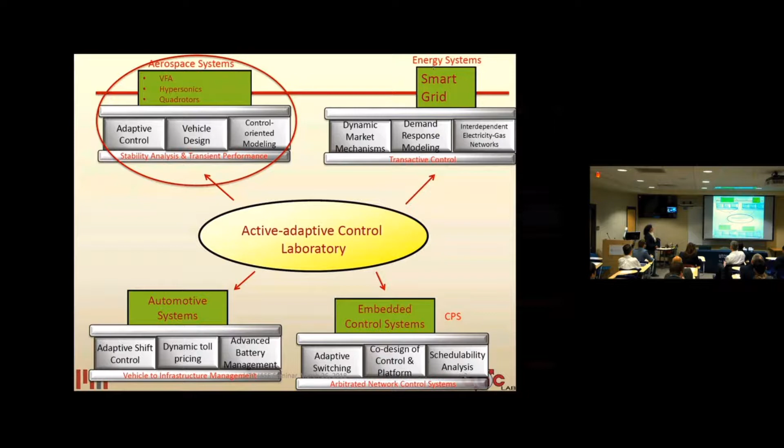So what I'd like to focus on today is this. And so if you want to hear about other topics, there might be other venues, and certainly I'm going to talk about this in Copenhagen. So moving forward.

I'm going to roughly go about talking about adaptive control using these three broad steps. So a bit of history. So we'll start with what exactly was the genesis, if you will, of designing adaptive systems in the context of engineering, the stability framework that was introduced, and how we really think about adaptation in the context of the problems that we've looked at and applied to a few problems in practice.

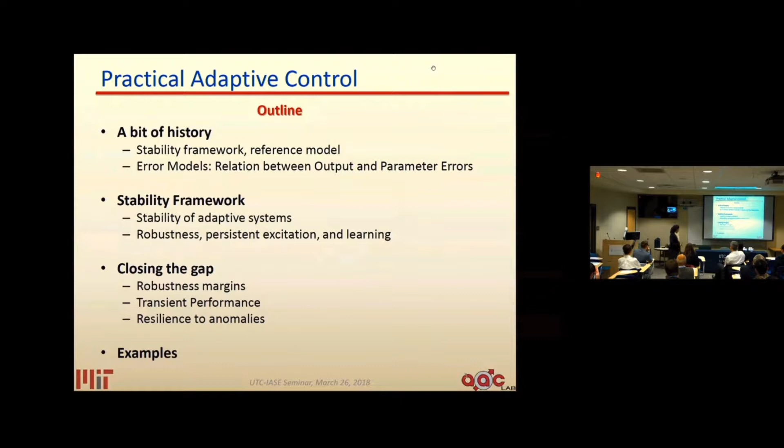And what really distinguishes what was done before and what was brought into the picture that sort of laid the foundations for adaptive control. And given that we've got the stability framework, what exactly needs to be done in order to take this methodology and transfer it to technology? And some of the things that would be relevant in this, the results that we've achieved in this context. And like I said before, I'll end with some videos.

So adaptation really is the key word here. And so the idea is that what we adapt is basically parameters in a controller. So we are talking about control, which means there is a notion of regulation. You track around a desired set point, or you track a desired trajectory, whatever is considered as the right thing to do, the desirable thing to do. Because it might be optimal, it might be fast, it might give you the right kind of performance that you're looking for, it might give you accuracy, all of that says that there is a control problem.

So typically in any control solution, what we do is that we employ a model. We need to know what is it that the system is doing, so that the controller is essentially an inverse problem, right? So you then shape the input the way you would like so that the output behaves in a desired manner. So you take the plant and you invert it in a way, and so that whatever you're putting in is what you'll get out. And so since you know what you want to get out, that's what you'll put in once you have the right inverse, right? So which means you need a model of the system.

Which means you need the model structure. However, the notion of adaptation is that there is something that is uncertain. What is uncertain in this particular problem is that we assume the parameters are uncertain. If you're operating around some trim point, around some set point, then you have certain dynamics, right? And suppose those dynamics are not known, because your operating point can vary, your environment moves you to a different point and it's unbeknownst to you. Therefore, the dynamics around that point, say for instance the Jacobians or the input matrix or the output matrix, are things that are unknown.

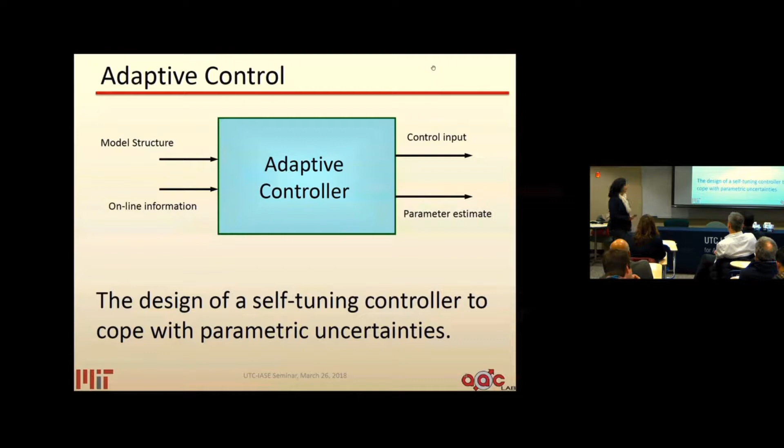If they're unknown, then you need to utilize some way of estimating that unknown quantity. What you do is you do the best you can and put in all of your prior information here, and everything that you gather online, you put it over here. Together you use this to not only generate the control input, which is what any controller would do, but in addition you also generate parameter estimates. Right? So that is what an adaptive controller is. It self-tunes its parameters so that, together with the parameter estimate and whatever you design as a control input, you are adapting to that uncertainty and at the same time providing a compensatory control action which gets you to where you want to go. That is what the adaptive controller is doing, right?

This notion, if you think about it, is conceptually very appealing. It's like, hey, I have this self-governing system, so it's smart and it's figuring things out as it's evolving, and it may make a mistake, but then it figures out from what happened how to correct itself. This really captured the imagination of some key individuals who were in a position to design and install a whole program. It was in the context of flight control, in parallel with the golden era of control systems, where all of the space stuff and optimization were happening too. In fact, what we know as the control conference right now had a precursor known as the Symposium on Adaptive Processes.

Part of that were all these different symposia, talking about the theory of self-adaptive systems and self-adaptive flight controllers. In fact, when designing these aerospace systems, you've got propulsion, you've got aerodynamics, and guidance, navigation, and control. By and large, the C in the G and C denoted adaptive control systems. If you look at even the books that were written at that time, a lot of them were on adaptive systems. Bellman's book talked about deterministic processes, stochastic processes, and adaptive processes. And Widrow's famous book is also about adaptive filters, which was very much a self-tuning entity. The servo mechanisms were all about that.

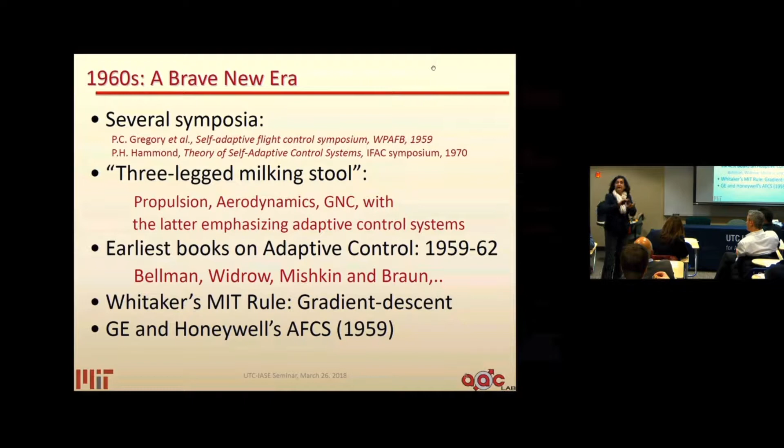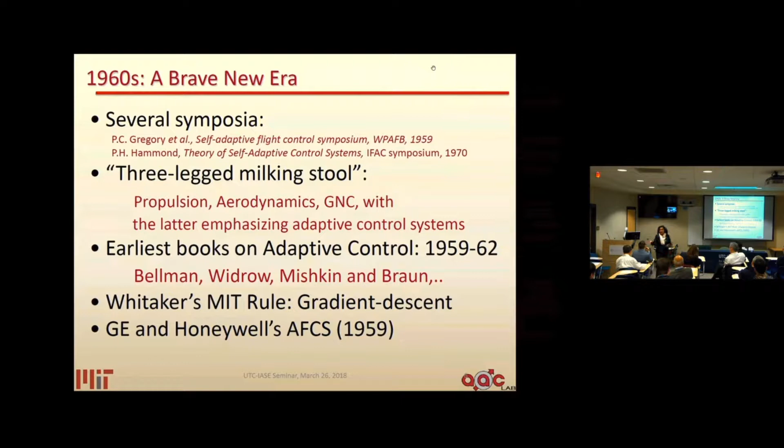It went into a limit cycle, and then there was a huge roll, followed by a side slip, and it crashed. And so the design space over which the adaptation was done and the information that they were gathering were insufficient. That was outside of the flight envelope, exactly. So what happened afterwards, and rightly so, is that people brought in theory. They brought in cautionary inputs, as the title suggests.

So what you're doing when you design these control systems is to not only introduce feedback, but there is some sort of integration involved, and it's nonlinear. So essentially you have a nonlinear integral gain controller, and therefore you're going to have wind-up. Anybody who's worked on PI control knows that wind-up is one of the biggest things that you need to worry about, right? So all of these papers that followed, and Patrick Parks' one, for instance, is a seminal one, basically said you cannot do the gradient rule blindly, and it can lead you to instability.

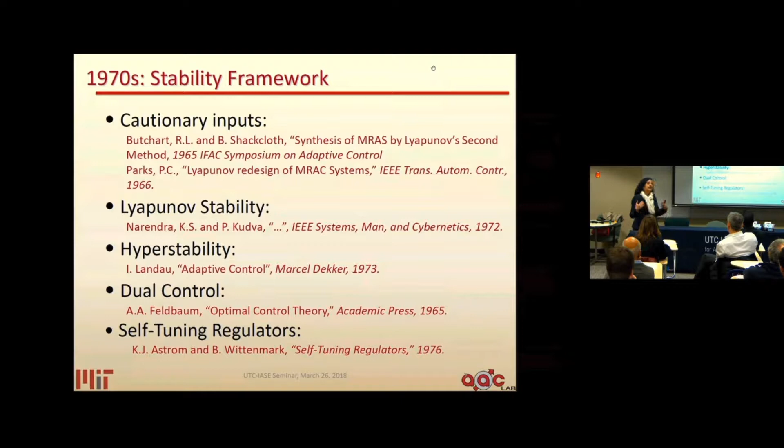And the whole Lyapunov stability framework and a lot of the things that followed, the work of Narendra, Ioan Landau, Karl Åström, Graham Goodwin and Steve Morse, basically provided a framework saying this is how one ought to think about, analyze, and synthesize adaptive control systems. And that led to the foundation. So let me tell you a little bit about what that is. Here are some more technical details.

We all know that when it comes to control, you start with a dynamic system. This is a very familiar set of equations. You've got X as a state, U is a control input, Y is the output, the set of all quantities you can measure, but X captures the most important relevant information, and everything is nonlinear. But the extra twist that you normally do not see in other control problems is that you have a parameter which is unknown. If you have that uncertainty, then you need additional complexity in the controller. So this is the adaptive controller.

And what does it do? It starts with something called a tracking error. I'll tell you more about it in the coming slides. It gives you a target. It's indicative of the size of the uncertainty that the system has. Then omega is a quantity that corresponds to all of the information that I can gather in real time. It could correspond to the input that I put in, the output, or any kind of filtering quantities or any other states that I can measure, right?

So I use all of that, and then what I introduce is a new state. The new state that I introduce is a parameter estimate for the controller. This could be anything. For instance, let's say PID is your favorite control design that works very well. It could simply be those PID gains which are no longer fixed, but are actually states that are varied deliberately. So theta C could be your Kp, Ki, and Kd, for instance. It could be MPC, though adaptive MPC is right now still complicated to do, and I'll explain why if there's time later on.

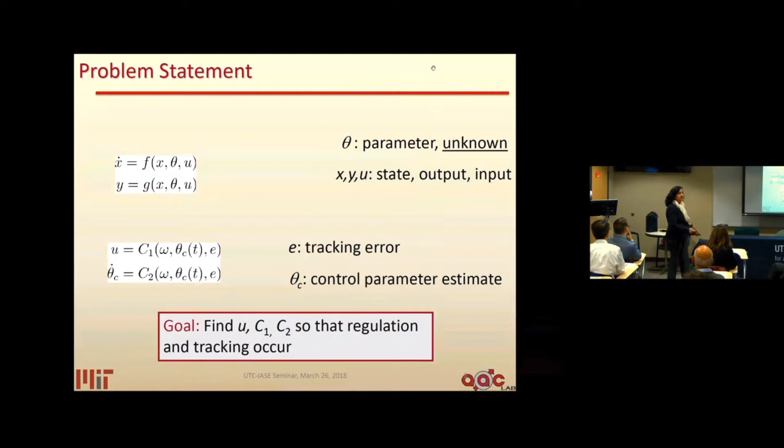I don't know whether 5 will work anymore. So you search in the space of theta by watching what the output error E is, the target error E, and trying to adjust it in a direction that minimizes the error. Right? So all of this means that I need to know what the error E is, which brings in the concept of a reference model. So a reference model is like a teacher.

So let's bring back, and I'm going to return to the analogy again in a later slide. You're a child and you're learning to walk, and your parent, presumably, is guiding you to teach you how to walk, right? So the reference model is like your teacher, like your parent. And because you're still learning, you're in the very initial stages where you don't know exactly when to take that next step and when to gain that stability and when to move into the next gait, etc., right? So there are these things that you need to learn, and so you need a target.

And that target basically is this guy. How do I pick it? Remember that it's not like I know nothing about it. There is some prior information. And that prior information is whatever you know to be the nominal model. And for that nominal model, you will design a nominal controller. And remember, control is an inverse problem. So you would pick this in such a way that the output basically follows a command signal, right?

If you remember your control history, that's basically how control came into its own as a discipline, designing servo mechanisms around the time of World War II. So you want this guy to follow this guy. So you design a controller so that automatically you regulate your design to be always around the command signal, right? So that's what this reference model is. So then what do you do? You hold on to this reference model in order to come up with this target error. How do you do that?

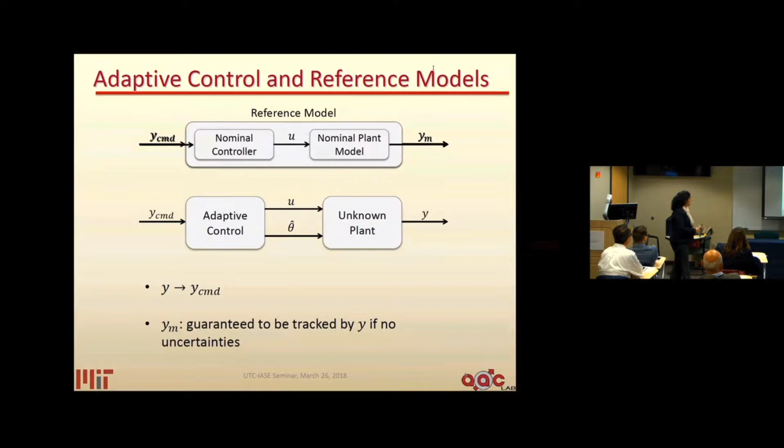So once you pose this problem, the next step is to say, okay, I'm going to have this output error E, and I'm going to choose my parameter in such a way that this error E is reduced. So to do that, let's assume that the correct value that I have for the parameter is theta star. So if theta were equal to theta star, this error E would be 0. So theta star is the uncertain parameter, and I don't know what it should be, therefore I pick some theta, right? That's the actual control value that I pick. So there is an error. So I toss a coin, and that's the parameter that I pick for, let's say, PI gains. So I say it's 5. But I don't know what the correct value is. The correct value might have been 2. So theta tilde is 3.

So what should I do? I need to decrease 5. But that's only because I told you that the correct answer was 2. But in reality, you wouldn't know it, right? So the problem is like this. It is equivalent to your being on a hill, and you want to get to the bottom of the hill. That's the name of the game. The problem is you do not know where the bottom is with respect to where you are, right? What you can measure is an E, but that error E is a very complicated signal, has a very complicated mapping to the parameter error. So this error model basically gives you the relationship between theta tilde and E.

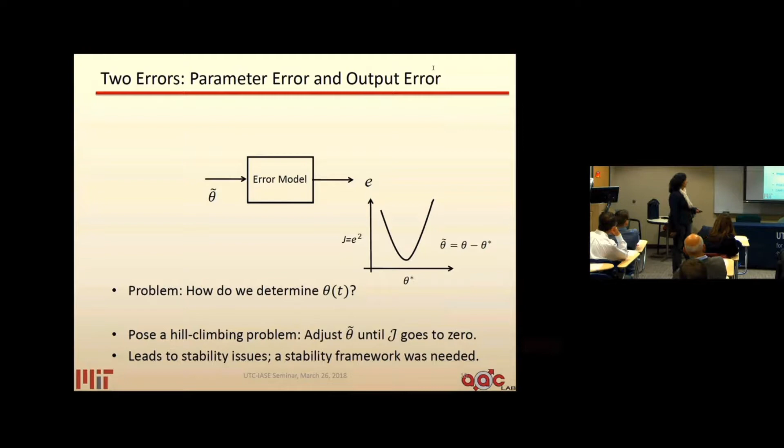So again, I'm going to keep things very simple so that if there are undergraduates in the room, they can also follow. I hope that everybody here has seen a first-order transfer function. So let's assume that this is your reference model. What you're interested in is following a step or any other signal R with some lag. So that's your y sub m. But what you have is some other transfer function, 1 over s minus ap. You do not know what ap is, right?

So I have an error, and it turns out that for this particular problem, I introduce a state feedback, and in this case, there's only one signal, right? So it's just theta times xp, and the answer would be simply, let's say I put it in with a positive sign, you subtract ap and add am. So it's am minus ap that you need in here, so that the closed loop transfer function will look like this. You don't know what ap is, and therefore you don't know what you need to put in.

But the solution is actually very elegant. All you need is to have theta of t to be this nonlinear integral controller, and that will automatically make sure that E will go to 0 for any ap. So this is what is great about it. The parametric uncertainty can be infinite. ap can be anywhere between minus infinity and infinity, and this will solve the problem completely, make sure that everything is stable, and the error E will go to 0.

I'm assuming the am is negative, or? No? am is negative, yes. Okay. Of course. Yes, you want your reference model to be well behaved. Yes, am is negative, correct.

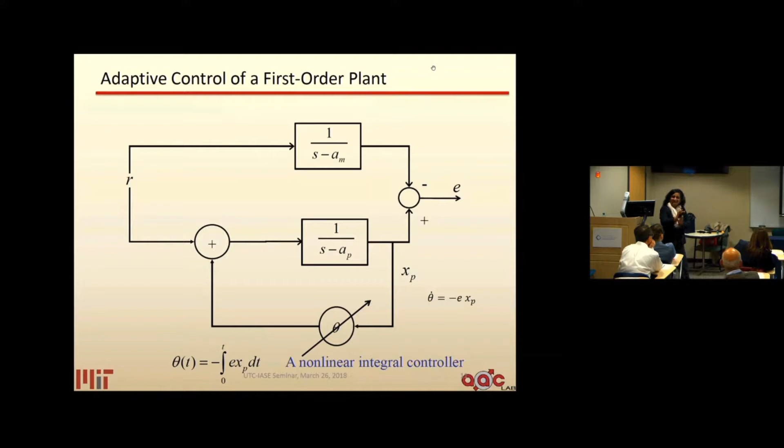All right? Though there is some thinking now as to what happens if your reference models are unstable. The analogy is that if you have an elderly person who is trying to figure out how to get assistance in walking, can another elderly person assist? You could argue that the reference model might have some design that goes into it, whether or not you want to actually make am positive, I don't know, so that it might be easier for an elderly person to be provided assistance than someone who's young and sprightly. So there's some amount of philosophical debate one can have about that.

Okay, so you can take this notion and make it any order and any level of complexity. So this says if I have an nth dimension, then I can still play the same game. I have an error E, and this is basically how my nonlinear integral controller works. This is my reference model. And here is the interesting error modeling.

Remember I talked to you about this nice convex hill? That's no longer present here. It's actually not even an algebraic nonlinearity. It's a dynamic nonlinearity that's sitting between your parameter error and E. Look at what's happening here. If theta tilde is the value at present, this is the dynamics that sits between theta tilde and E. And so it's a transfer function, which means that it's dynamic, right? It takes a certain amount of time between the time you introduce a change in the parameter and the time it shows up in the target.

So you need to really have a dynamic stability framework, and that comes from many other tools, including Lyapunov function. So here's the Lyapunov function that we pick for this problem, where you not only have to worry about the standard quadratic term that you use in order to look at stability, this is for instance what you do in linear systems, but you have to also intentionally introduce these other states, and you have to show that this V is going to be non-increasing, and then you introduce other technicalities to show that E will go to 0.

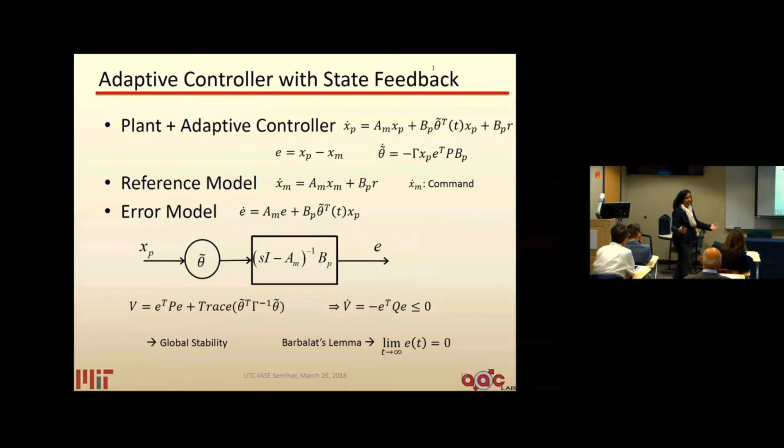So this says that you can take just the notion of what I talked to you about and use a stability framework to adjust parameters in a problem where the parameters are unknown and still guarantee control-centric goals such as tracking, and of course make sure that it's stable. As you take this forward, we can even take it one step further and bring in the problem where all states are not accessible.

So here is where the problem becomes even more challenging, which is that when you have uncertainties, you need to identify and then control, right? So if you think about it, identification and control are really duals of one another. You need infinite time in order to identify, in order for all parameters to converge, because it's exponential. But you can't wait till infinite time because you need to control the system now. You've got your flight control problem where there is a certain amount of roll instability, or if it's a hypersonic vehicle, your phugoid mode is unstable. So you need to come up with a controller now, not after infinite time, right?

So now there is a need to not only do identification but control simultaneously. So these are the problems where adaptive control is really useful, and that's what's happening in here. So here is a very interesting structure where this entity here serves the dual purpose of both an observer and a controller. So it's a very interesting problem where you have to have the right structure so that even when you're identifying,

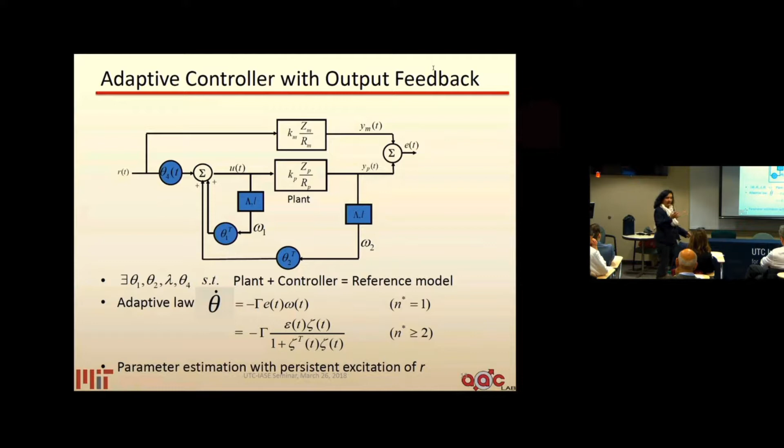I had a discussion with Dugiralo earlier about learning. Now, what is learning? It's a hot topic these days, right, with machine learning. So in this case, learning is learning the correct value of the parameters theta 1 and theta 2. Now, that is a different ballgame from having theta 1 and theta 2 go to a safe value where the closed-loop system is stable. Because there are plenty of multiple values of theta 1, theta 2 that will guarantee stability, but only one unique value, which is the correct value of the controller. And then also indirectly, it also means that you learn the plant parameter. So that happens only if the reference input probes all of the eigenvector directions of the problem, and that is known as persistent excitation. So it's a slightly different thing.

Okay, I'm sorry, I'm giving a lecture, like a seminar class, rather than telling you about new results. So now I get to the new results. So it turns out that when you do all of this adaptation, because you have not learned the correct parameter, there are some robustness issues.

So it turns out that in order to make sure that even when you adapt, and when you have all of these disturbances like parameter variations or unmodeled dynamics or disturbances, you have to have a certain amount of changes in the way in which you design the adaptive law, or you use persistent excitation. And this was what was done in the 90s, and that gave us global solutions when you have external disturbances which are bounded or time-varying parameters.

So the question is, now that you've got all of these results, which give you a stability framework and also a certain amount of robustness, what remains that stops you from applying this in practice? Turns out there are a number of problems. The first one is that if you've got unmodeled dynamics, like, let's say, you always have an actuator that actually implements whatever control input you're putting in, and invariably in the control design, you neglect the actuator dynamics, saying, hey, it acts very quickly. So in principle, the signal here is exactly the same as that signal, and I can think of this as a straight wire. It's not true in general.

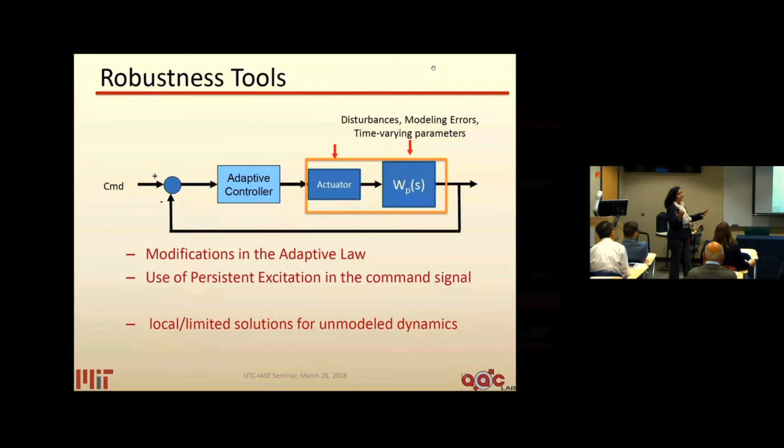You always have unmodeled dynamics, not just due to that, but simply because your control model is often much more simplified compared to the evaluation model. What about nonlinearity? Nonlinearity, again, you can think of as additional perturbations that introduce robustness issues. Turns out that there are no global answers, and this has been an open problem for the past 30 years.

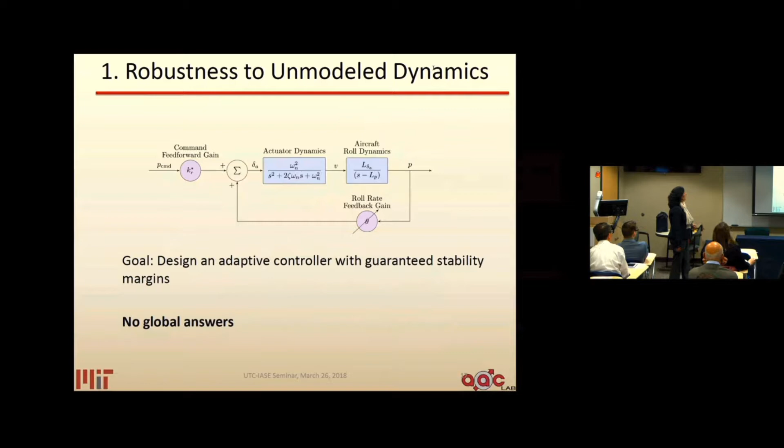The other interesting thing is that if you do the simulations for an adaptive controller, and those of you who have worked with PI controllers can really relate to that, when you crank up the gain in any PI controller, you introduce a lot of oscillations. And that's what happens in an adaptive controller too. This is an additional adaptation gain that you can introduce in the nonlinear integral gain. As you keep increasing this, these oscillations get worse. And if you have this kind of oscillation, practically you don't want to implement this kind of technology, right? You really have to get rid of them.

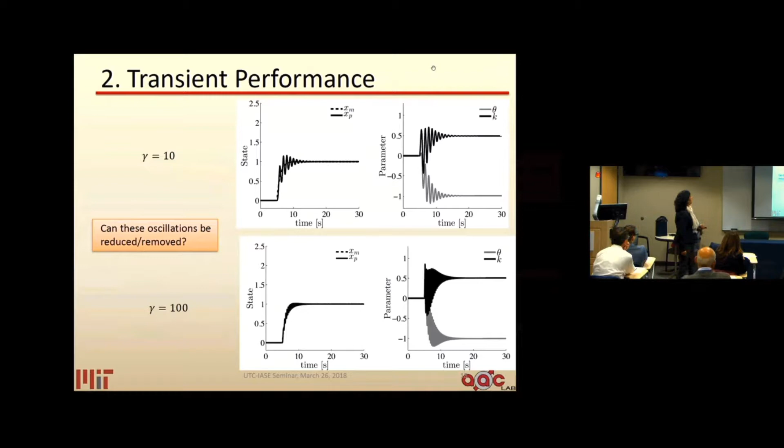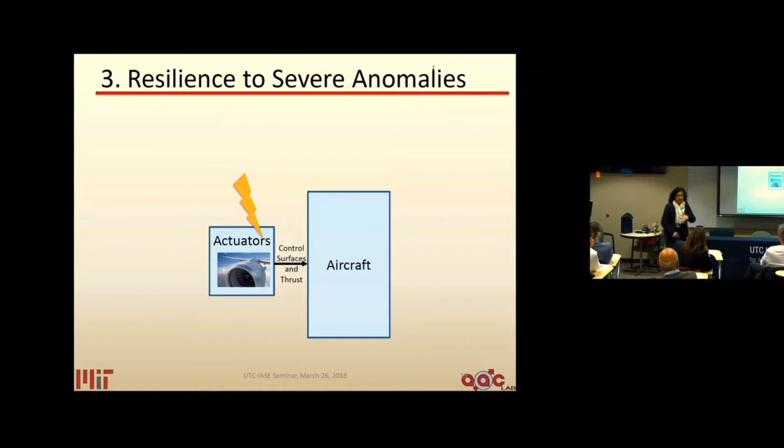The other is: given that you've got this very advanced control design, if you hit it with a very severe anomaly, or you've got all kinds of magnitude saturation and rate saturation, is it possible that your fancy controller can really successfully work and provide the right corrective action, even when, say, a bird flies into the engine, and still deliver satisfactory performance? So these are some questions for which we have answers. And that's what I'd like to share with you in the next 15 minutes or so.

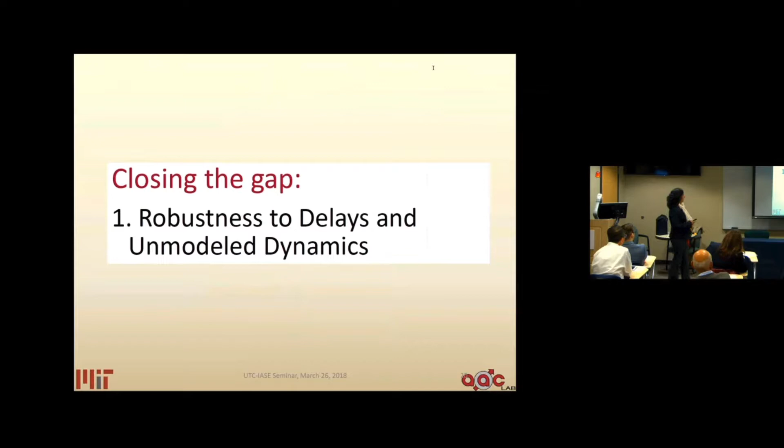So the first one is robustness to unmodeled dynamics. And I'm very proud of this result, which I'm hoping we're about to submit as a paper to the Transactions on Automatic Control, and that the community will receive it with the same enthusiasm that I have. And that is that we have a global answer to the question: when you have unmodeled dynamics, the adaptive controller will be robust. So this is the plant. These are the unmodeled dynamics that we considered.

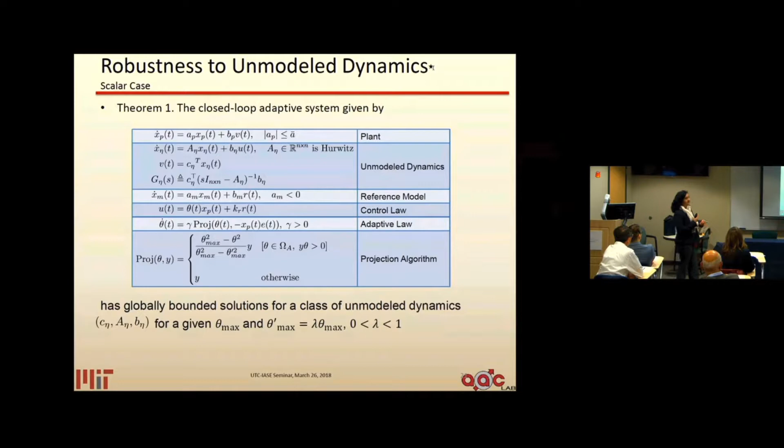If it's first order, then you just pick a first order reference model and you have this very simple control law. And it turns out that for this class of problems, you can show that a simple projection algorithm along with my nonlinear integral controller will guarantee a solution that is globally bounded. And again, this tells you that even though a system is nonlinear and time varying, it is possible to have something equivalent to a gain and phase margin for this nonlinear controller. Essentially, you're representing an nth order system by a first order one. Is that what you're doing? No. It's just a first example.

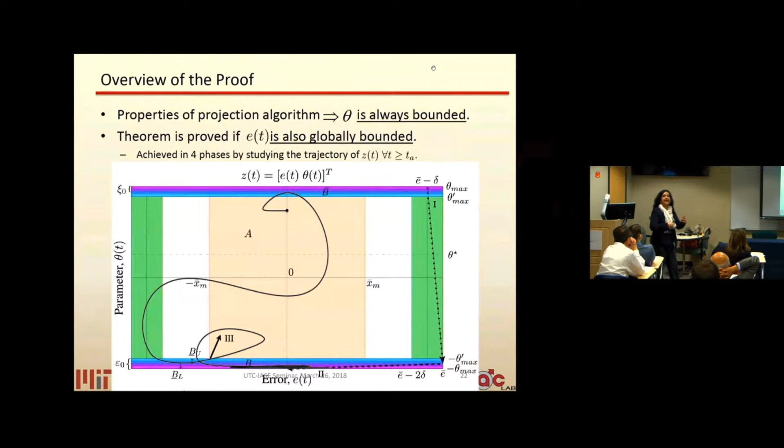Okay. And I want to convey the idea as to why this works. When you use a parameter projection, what that is guaranteeing is that you're putting everything inside this tunnel, inside this box. But the next step you have to show, in order to show that everything is bounded, is that you're not going to run away inside the box. So this is what you pick by design in the controller, but this is what I'm guaranteeing exists through my analysis proof. So that's the idea.

If you go now to a higher order dynamics, and again, it doesn't have to be second order, it can be nth order. So here is the model dynamics, and here's the reference model, and the theorem basically says that even when you have, so you could make that n, not necessarily 2, that you follow these steps in order to show that everything will still be bounded.

And so the idea is, again, basically that you have now 4 dimensions or 2n dimensions, but what you are able to collapse this whole problem into is 2 scalar variables that are most important, which is epsilon 0 and theta 0, and there are these additional dimensions where they're all driven completely by this, and we make use of this fact and the connection, interdependence between these scalar variables and the n-dimensional variables to guarantee boundedness. And so again, this is just to give you a sample of what we've been able to achieve. So the second one is transients.

Yes? How do you know the unmodeled dynamics, or do they have any particular structure? So here, what we are assuming is that you have prior information about what the maximum value of the parameter is that you're going to put in, for which this controller will still be robust with the unmodeled dynamics in there. So let's say that there is a maximum value of theta star. And if you put that theta star in and you have this closed loop, it has a certain amount of robustness margin. And the G eta of S is within that. Okay. So that's the class of perturbation that I can handle.

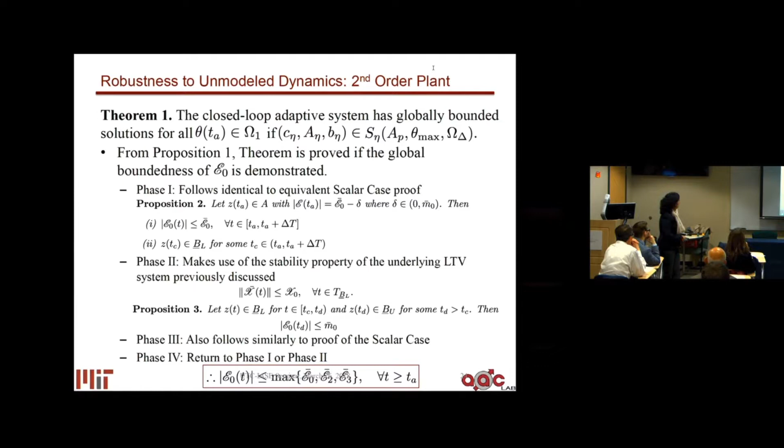we had to come up with the right transformation of variables. Because we had to really separate it into some key variables that capture all of the impact of the unmodeled dynamics. The second thing we had to do is to break it up, and it turns out that there are some interesting relationships between these quantities that I can measure and the remaining quantities that I'm not able to. And it turns out that there is an absolute stability, where you have a strictly positive real transfer function in the forward loop and a first and third quadrant odd monotonic nonlinearity in the feedback loop that you can cast the whole thing into, and that's what gives you global boundedness. So it's a combination of the Lyapunov stability and the right kind of transformations of variables that we had to adopt. Okay?

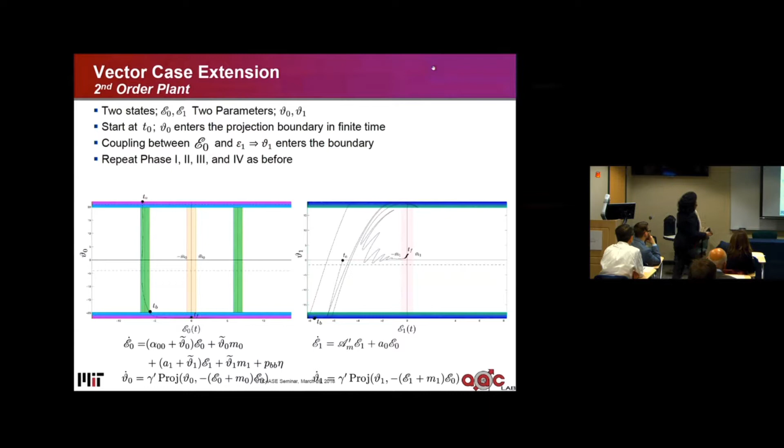All right, so here's the next one, which I think, even the last one, the math was pretty heavy, so those of you who are not familiar with it might have found it more complicated, but this one is very straightforward and very conceptual. It all goes back to the same idea of the child and the parent analogy that I was trying to make. So a reference model is like a teacher, right? So remember I said there's large transients? We came up with a method to fix it. So now we can design adaptive systems which do not show any of those transients. And the idea is the following. We introduce a feedback gain in here. So what is it that this is doing?

So let me see the next slide. Okay. So you're a child and you're trying to learn how to walk, right? So if I have a system where I'm asking it to adapt, that's basically the starting point. So when you have uncertainties and you have no idea what the parameter should be, and you're asked to walk, then it is only understandable that your transients are very poor, right? So remember, my reference model said just walk, right? So that's corresponding to the dashed, straight line here. But here is the adaptive system. It tries to, so what does it have to do? It has to approach this dashed line. But it tries to do that. It's still adapting, right?

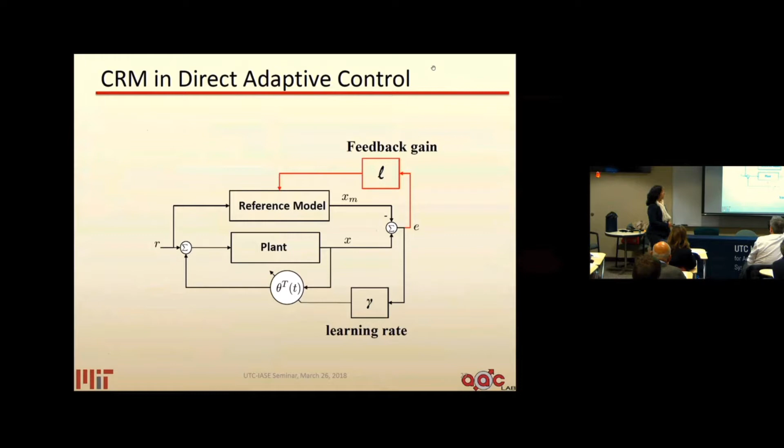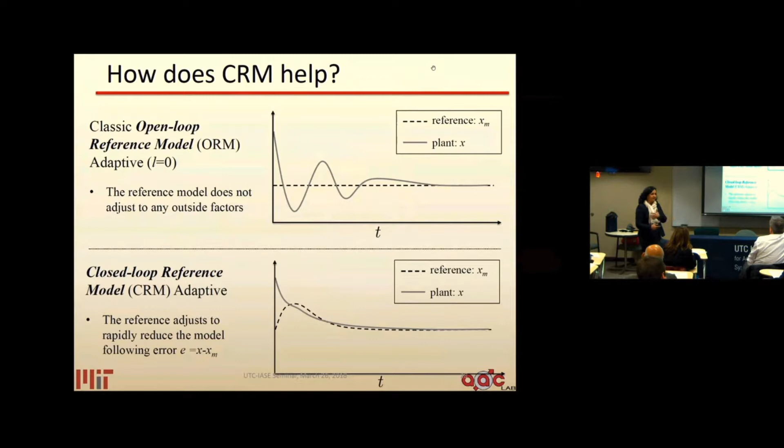So there is an error, and so that error is basically absorbed by the reference model. So instead of saying walk like this, the reference model comes halfway and meets you and says, okay, this is basically how you are supposed to walk. And that closed loop reference model seems to do wonders in terms of fixing the transients. And this is, again, something that we are very happy about.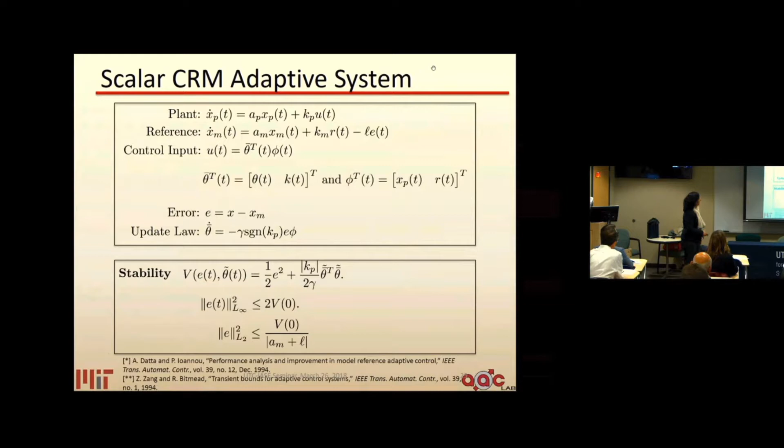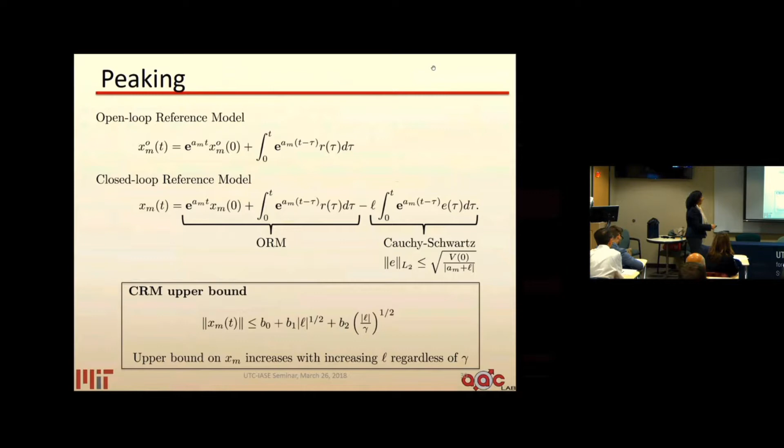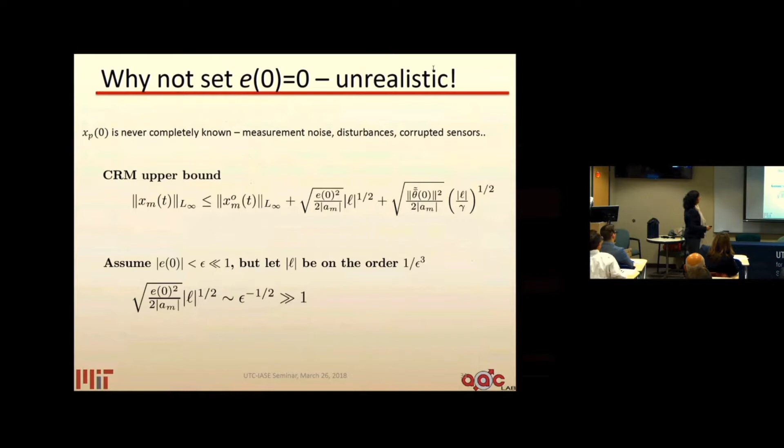And here's all of the math that basically proves that the transients are indeed contained. So here is the plant, and here's the control input, here's the update law. The stability proof basically says, yes, these are the kinds of L2 norms that you're going to have. And then we can analyze what happens to every signal in the loop. We can look at the reference model, and when you have a closed loop reference model component, you can show, remember there was a feedback gain L, and you can derive bounds that basically relate these feedback gains as an upper bound to xm, which is the output of the reference model that I'm using in order to derive the target. And then I can also derive the L infinity bounds.

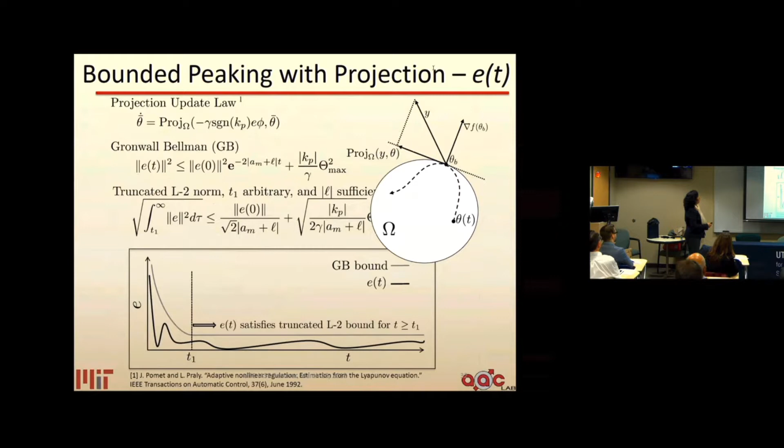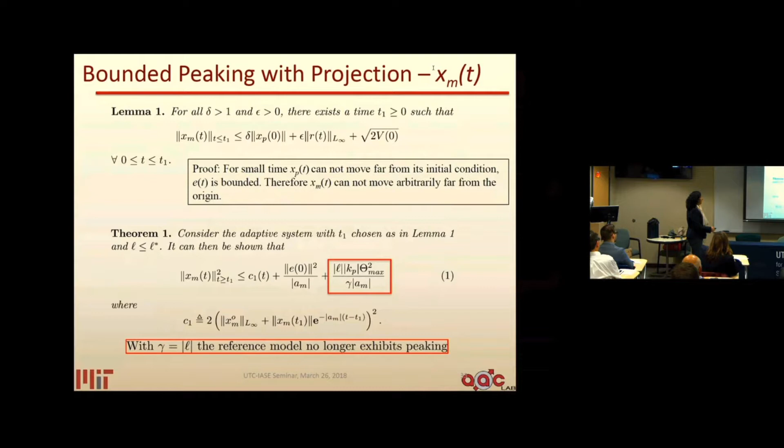The previous one was an L2 bound. Then I take all of that and I use that information to get an L2 bound on what my error is. And once I have the error information, then I am able to get a tighter bound on the reference model outputs, which is what this is saying. And if you pick the adaptation gain to be of the same order as that feedback gain that I used in my closed loop reference model, you can show that the reference model no longer exhibits this peaking phenomenon. And I use that in order to derive the bounds on what my adaptation gain is doing.

So when I have very poor transients, basically the L2 energy contained in it becomes very high. And you want to reduce that. And having the bounds that I showed you enables this. I can prove, remember all of this has the L, and I pick the right scaling between the adaptation gain and the feedback gain. And that gives me an opportunity to go from something like this, where I have a lot of transients, to something that is very smooth, and which basically comes from all of the bounds that I was able to derive, which comes because of the L.

By wrongly selecting L? Okay, so introducing an L gives you an additional degree of freedom. So that basically gives you a way of optimizing the transients. Okay. So certainly, yes, there are values for which you can make it worse, but it also gives you what we can give, which is design guidelines, like for instance, this kind of a thing, which helps me have the right balance between improving the transients and having a control goal.

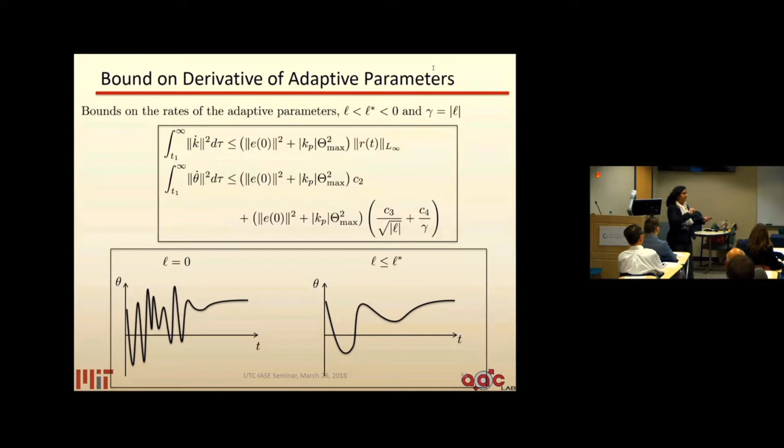Like a helicopter mode. It could actually be. Absolutely. In fact, that's a very good point. So here is a case, let me see. Here is a case where it's like a helicopter parent, where you're essentially, think about it, okay? Learning and synchronization are basically trade-offs. If you're always interested in having very good performance, then it's possible to do that without any learning, right? Which is basically what a helicopter parent does, you know the expression, right? Those of you who, so it's basically like you're always hovering over your child. And you never let the child make any mistakes because you don't want your child to be hurt. Then the child doesn't learn, right? And that's what's happening in here.

So here is a case where L is very small. Here's a case where L is very high. And what was shown in here is the right trade-off between synchronization, which is here, and learning. See, because here, this is what you want the reference model to be. Whereas the closed loop meets you all the way, right? And so you don't want that. So that's basically the idea in here. So you can see that everything on this side had no L.

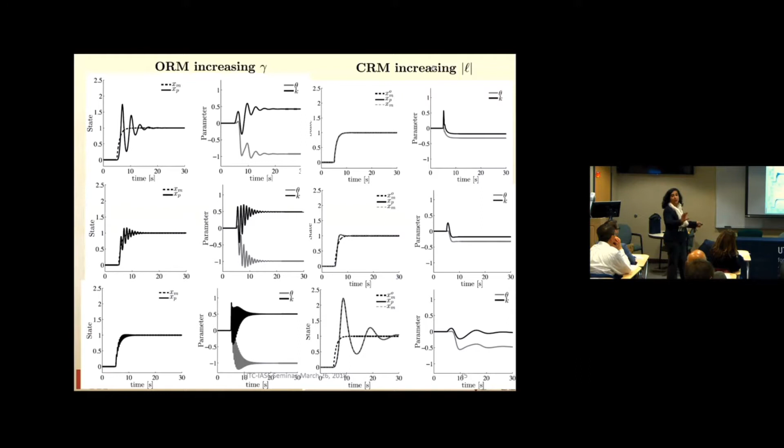And so that's the one that had a lot of transients. So you can see that it's completely gone with this closed loop reference model. Maybe I'll skip this. There's another idea.

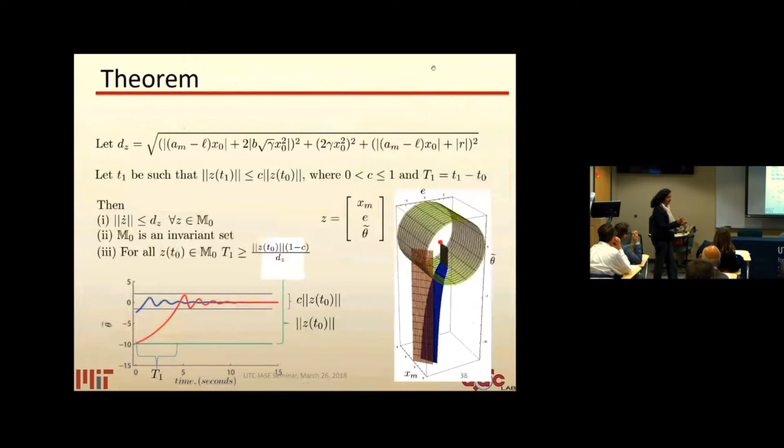And the idea here is basically that everything I talked about is adaptation, smooth adaptation. But that's different from fast adaptation. And it turns out that there are regions, when you go through the learning, where the learning is very, very, very slow. So there, it's slow adaptation.

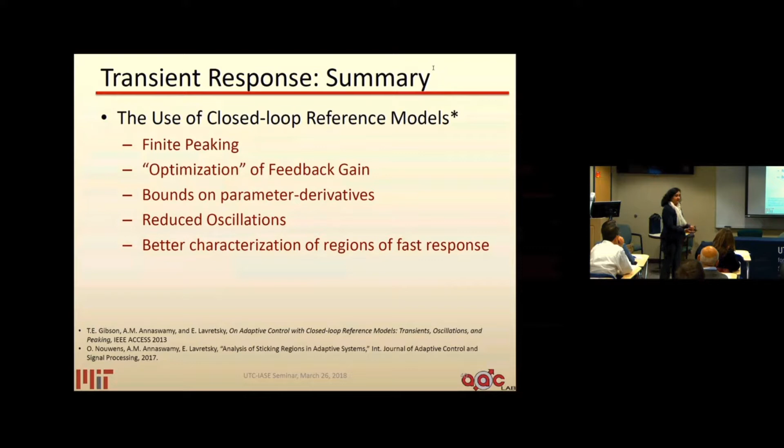And it's good to know in a nonlinear space, in a state space, given that it's a nonlinear problem, where your convergence speed is very, very slow, because then you would design it in a way so that you avoid it. Because that's where you're least robust to disturbances and so on, and that's basically what we have done in here.

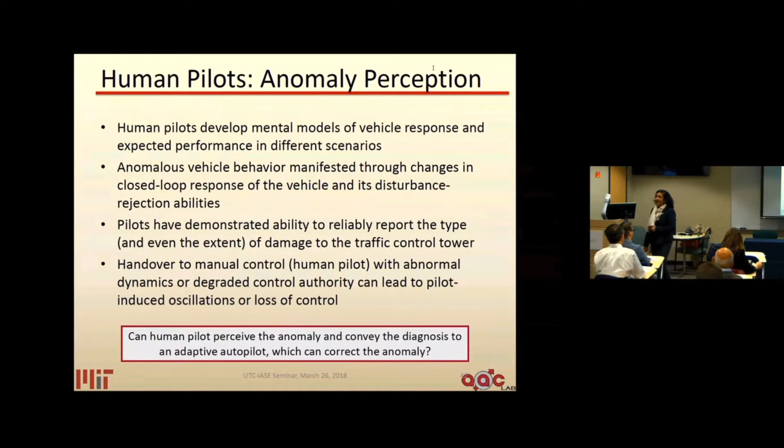Okay, so let me take 5 minutes to explain this, and then I'll end with some videos that we have. So the idea here is basically whether or not you can use the expertise of a human pilot and an adaptive autopilot in order to withstand severe anomalies. So when you have an anomaly present, human pilots appear to have the ability to have a better model of what the vehicle response should be and what the performance should be in different scenarios.

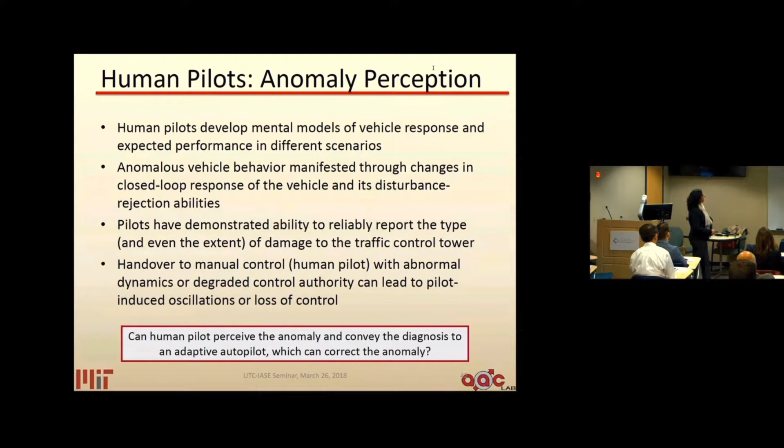So what that means is that if, say, for instance, one of your rudders is sticking and is not moving, then there is an anomalous vehicle behavior, and that in turn results in some sort of changes in the vehicle response. And so in many cases, the pilots actually have the ability to tell you, okay, this is the kind of thing that might be happening. So is it possible to use whatever information we have about the pilots so that the right handoff occurs from human to machine and back to the human, etc., so that you can correct the anomaly in the most efficient manner possible? So that's basically what we're talking about in here.

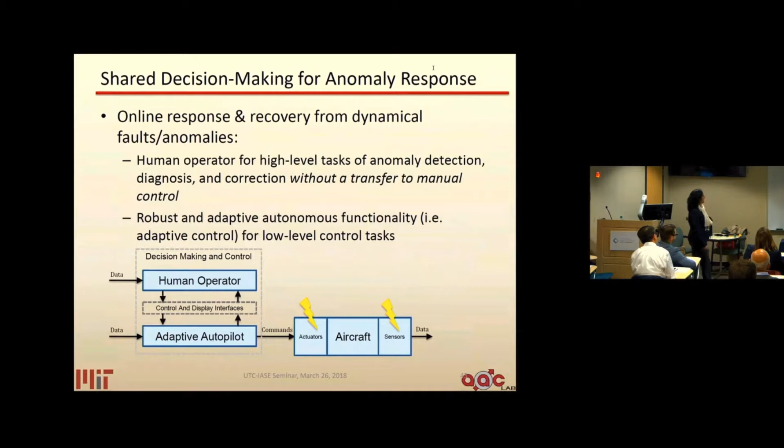So if the actuators and sensors are corrupted, can we make the decisions through the right combination of these two decision-making entities in order to have the best online response and recovery? So the kinds of problems that we looked at are two kinds of anomalies. One where basically the control surface was compromised so that instead of having a B matrix like this, the B matrix was compromised by, so imagine if each of the control inputs' effectiveness basically was reduced. So that was one kind of anomaly that we looked at.

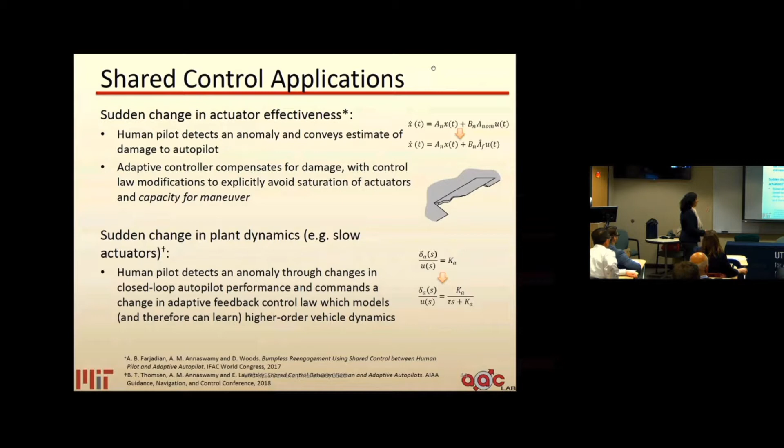And the other one is where there could be simply a drop in the bandwidth. So you have a lot more lag. So whatever used to be an instantaneous response now takes a certain extra time in order to respond, and so it basically makes the vehicle dynamics higher order. So we looked at these two examples, and so we basically compared. So here is a pre-anomaly model, and here is a post-anomaly model.

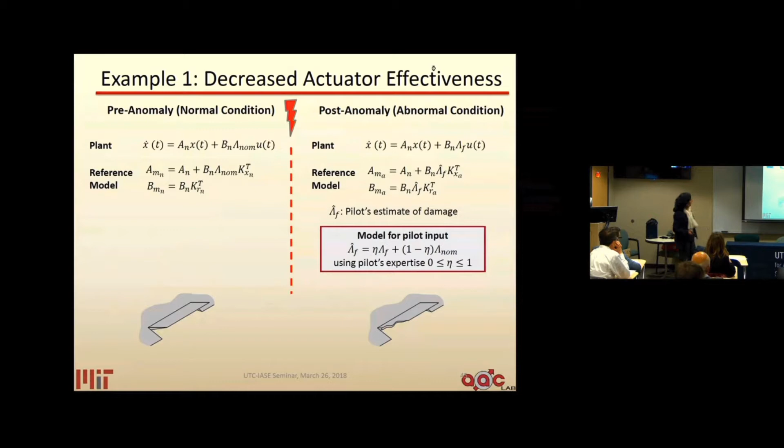And so the reference model basically is something that is built based on what the pilot estimates the damage to be. So the pilot says, okay, I think that I have this amount of compromise in the control surface. And the pilot has a certain expertise. So eta being very, very small says that the pilot is not an expert. Eta close to 1 says the pilot is confident, and you can trust. Basically, the trust increases, and together you make up a lambda f hat, and you basically use that information in coming up with the adaptive controller. And here is where an interesting

concept can be used. So as humans, this came in collaboration with a social scientist who works on basically cognitive models of humans. And so we all have this inherent capacity for maneuver, which we use as a guideline for figuring out how much we can push ourselves. So when we are really faced with extreme circumstances, how do we figure out how much extra energy we can expend? How many all-nighters can you pull before you fall apart, you know? So the way we do that, apparently inherently, we have a metric that says, after I recover from the anomaly, I still have some energy to spare. That's how much I push myself. So that's the capacity for maneuver.

So like we always have this inherent monitoring of our ability, and this is, okay, now my body needs to rest, or now I cannot push myself anymore. So we have that inherent capacity for maneuver.

And we use that as a directive for saying, okay, if I'm fully functioning and I'm able to do this task in 5 hours, now that I'm in a compromised state, I'm going to let that become 15 hours. So that's how much I have gracefully let my command degrade, right? So we use that notion in order to come up with a combined adaptive and human pilot control.

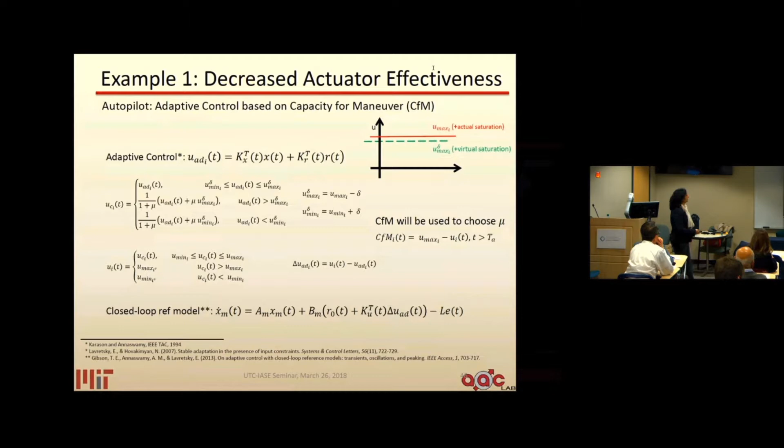So this is the kind of result that we got, and we compared it with a conventional fault-tolerant controller. So here is a case where we had 2 successive failures. One rudder saturated, followed by another, I believe, in the aileron. So even after the 2 successive failures, what you're seeing is how the side slip responds. I used to command it by 3. I decided with my adaptive and shared control design that I need to degrade the command to something like 1.5, and I was able to still track it accurately. So that's what I did with my bank angle, and that's what I did with my side slip.

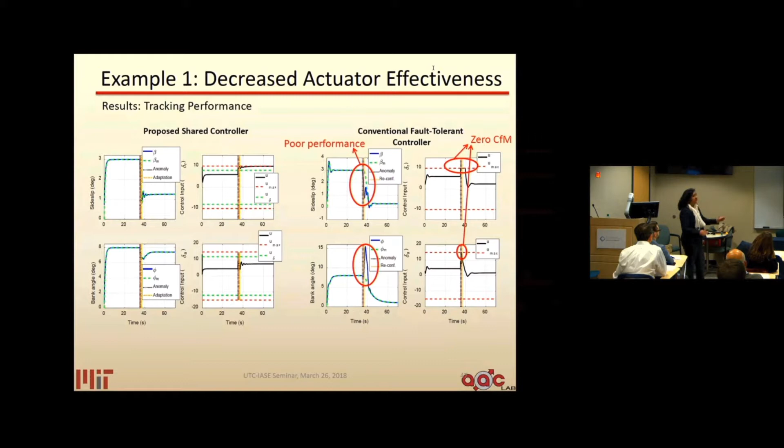Compared to that, the conventional fault-tolerant controller actually had to degrade the performance significantly. So you can see that the bank angle as well as the side slip angle is much smaller, and it has a lot of oscillations, and it ends up depleting all the capacity for maneuver compared to what we had with this design. So again, the idea is that we are trying to allocate the tasks and have certain things come from a decision-making authority that have slightly complementary skills, because certain things that the humans can perceive implicitly, and that information is then transmitted to the adaptive controller that is able to quickly figure out how much by how. So for instance, this command degradation is completely determined by the adaptive controller, and we were able to get good performance.

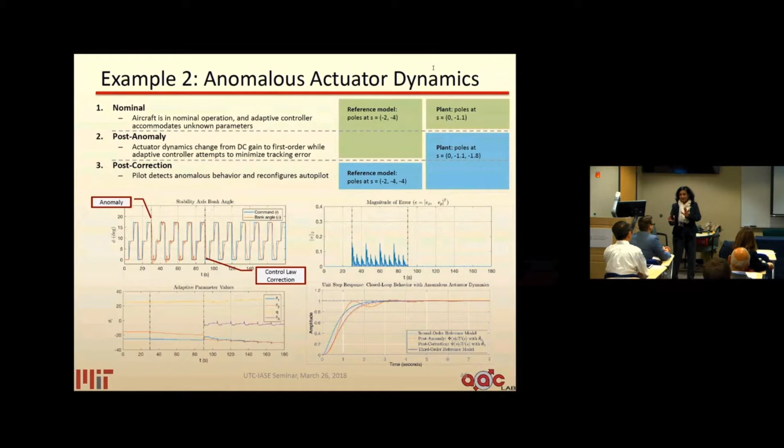So then you have the second example where we had a latency change. Here, again, the pilot gives the information saying, hey, wait a minute. So here is the anomaly, where the anomaly occurs, and the pilot looks at how the vehicle is responding to that anomalous behavior and says, wait a minute, the bandwidth is not correct, so you really need to increase the complexity of the corresponding controller. So the adaptive controller switches to a higher order, and you can see that instead of adjusting only 3 parameters, you're now adjusting 4, and when you do that, you have much better performance. So this is another instance by which the human and the adaptive autopilot are able to work together. Those are the 3 things that I wanted to convey to you in terms of closing the gap.

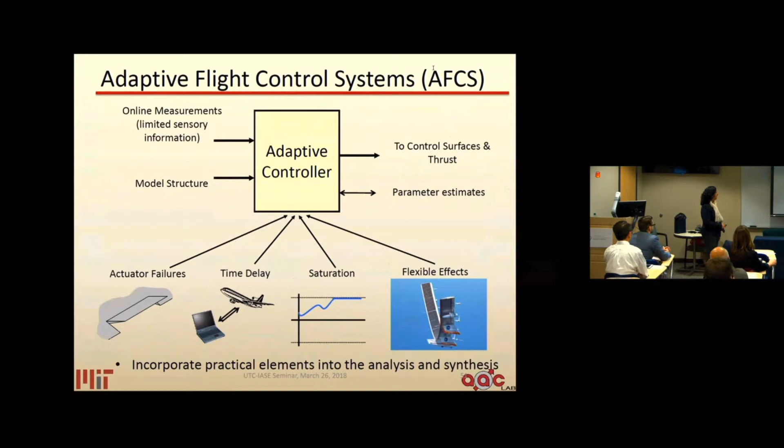We have implemented it in a number of applications, both aerospace and automotive. These are all the different types of anomalies that we looked at. There's actuator failure, there could be time delays, the control inputs can saturate, there could be flexible effects. One example was a generic hypersonic vehicle where the purpose was to make sure, even with uncertainties, for instance a loss of effectiveness, that there were certain regions the state variables were not allowed to go into, because that could correspond to unstart.

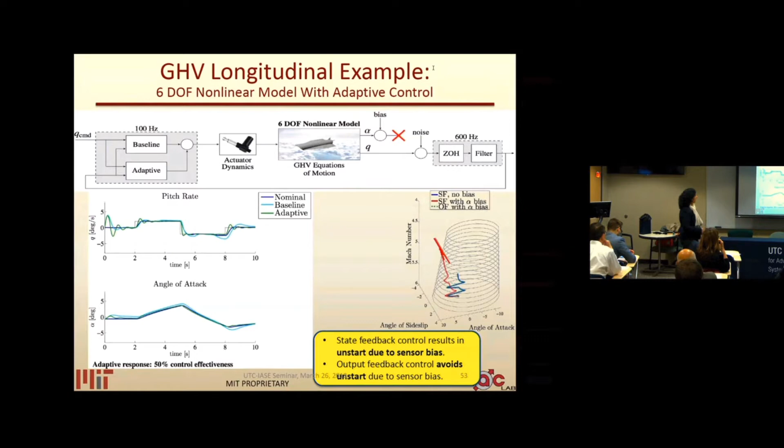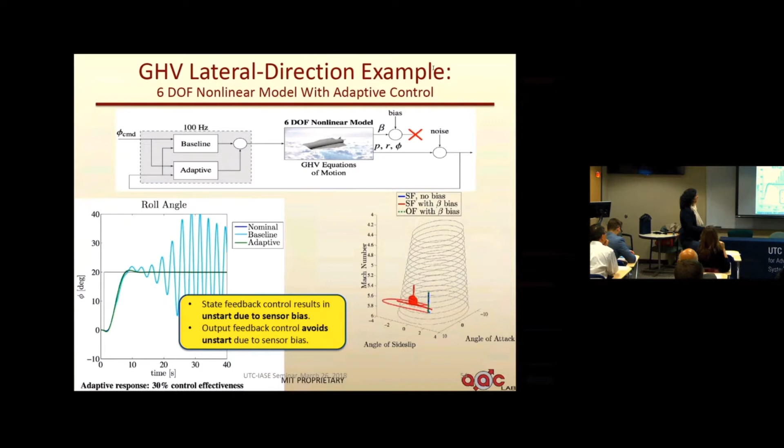What we were able to show was that our design, which is the output feedback, does a much better job compared to the state feedback, which wanders away and goes outside into the undesirable region. And this is another lateral direction example where, again, the adaptive design does much better compared to the baseline, where the compromise occurred because of the uncertainties, and we also had a corrupted sensor. You can see that the red wanders out, whereas the output feedback design stays inside and behaves exactly like what it would have done when the corruption was not present. So I'm going to skip the VFA, and let me end with a few videos of quadrotors.

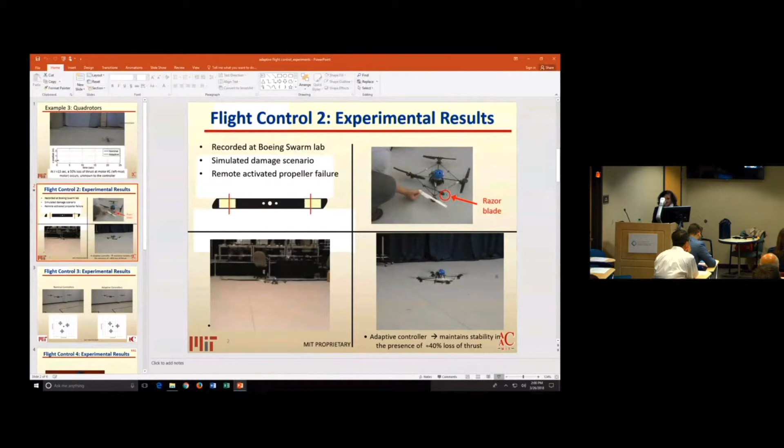So let me skip this in the interest of time. Okay, so these were much before drones were a thing. Our purpose was to show that adaptation works, which means that if there is an online sudden change in the vehicle dynamics, you need to be able to figure out how to fly.

So what we did was we took this, and first of all, you can see that the color of the propeller is different, because the material was graphite, which we could cut. So we cut it and we stuck it together with duct tape. Okay? And then we had a little blade in here. So we then launched it and the blade would pop up, and it cut the duct tape when it was hovering.

So it basically reduced the moment arm, so the amount of thrust that came from the rotors changed. And that introduces a roll, which the quadrotor then had to adapt to. So we then designed the algorithm, and what you see on the left side is a standard LQG design, and this one has the adaptive in it.

The student developed it at MIT and tested it, everything fine. He flew to Seattle. It's the same code that he implemented in the lab, and this is all in Seattle. Right now is when we cut it, so you can see that there is a roll and it crashed. Whereas the adaptive, I don't know if I have a slow motion thing too. I don't know if you saw a little white piece of it. You can see that it is able to adjust while flying. And all we did was make one of the gains theta, according to the non-unique controller that I showed you.

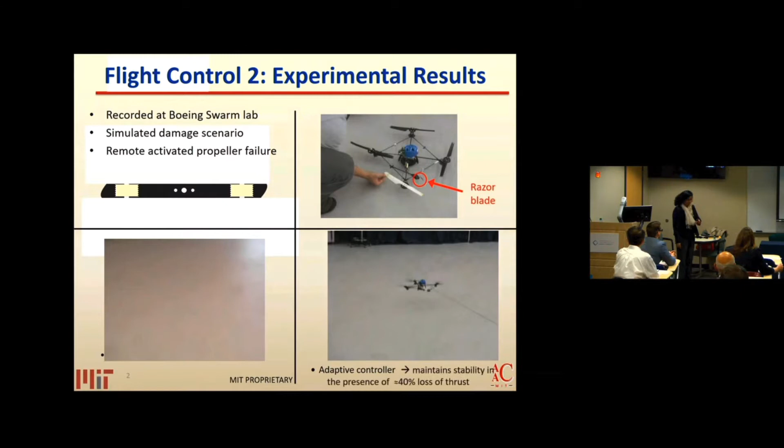So now that one vehicle worked, we said, I'm going to have lots of them, right? So what we did was we flew this, and the idea was to have them fly around in a circle. And when this guy comes to the six o'clock position, he's going to fail. So let's go back and fly in a circle, right? So he scampers back. Fortunately, that's even a stronger collision. He gets stuck in the downwash and otherwise he will get it right on.

You can see the footprint, it's the same data just superimposed on a cartoon, so you can see how the trajectory changes. There are waypoints, and the waypoints basically are moved in a circle. So right about now, it fails. You can see that's the amount of excursion from the circular path. Now if I do the same thing again, he comes to the six o'clock position, and you're going to see what he does and also what the other two do.

Momentarily, the others stop and even try to bend backwards, because there's basically an adaptation in the waypoint, in the guidance command as well. You can now compare the two, the non-adaptive and the adaptive, and you will see that when the blue comes to the 6 o'clock, the excursion is much smaller.

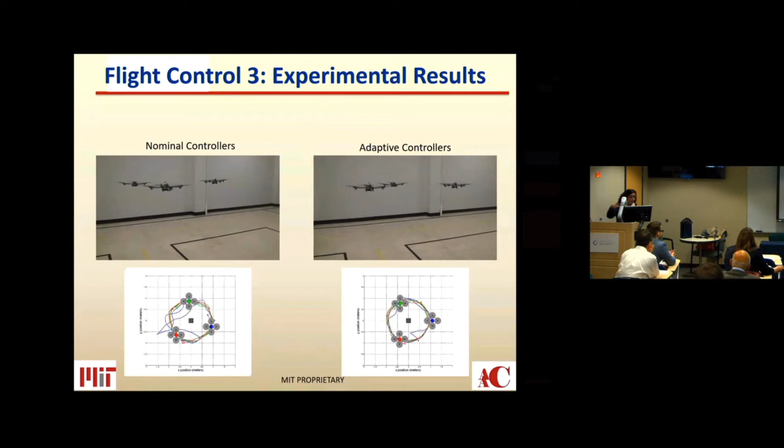So here we introduced two levels of adaptation. One was to the individual vehicle, so it always had its own error E and corrected the parameters to minimize that E. But we also had a collective error, where the distance to the nearest neighbor was also something that had to be minimized. So we used both of them, one for correcting the control loop, and the other for the guidance loop. And it was nice that they worked together.

I'm going to skip this. These are just other videos that we have.

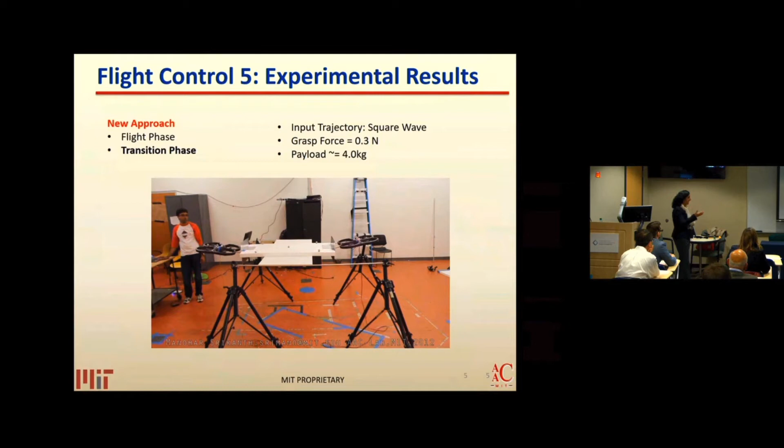We ran out of funding before we got into adaptation, but here is just aerial robotics, if you will. The idea is that we wanted to have two quadrotors manipulate a task. We wanted to not only maintain stable contact, but actually execute the periodic motion. So we had to worry about the kinematics, we had to worry about what the contact constraints were, and make sure that the contact remains stable even when you introduce dynamics.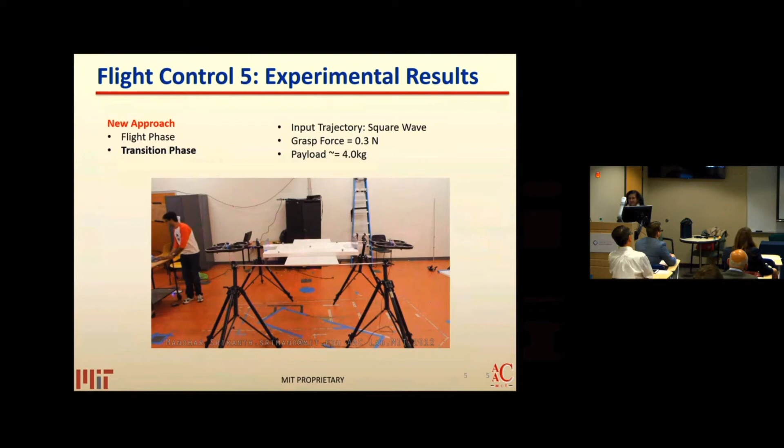So we then wanted to change the surface and have uncertainties there and have it adaptive, but we ran out of time. But it's a nice video, so I thought I would share it with you.

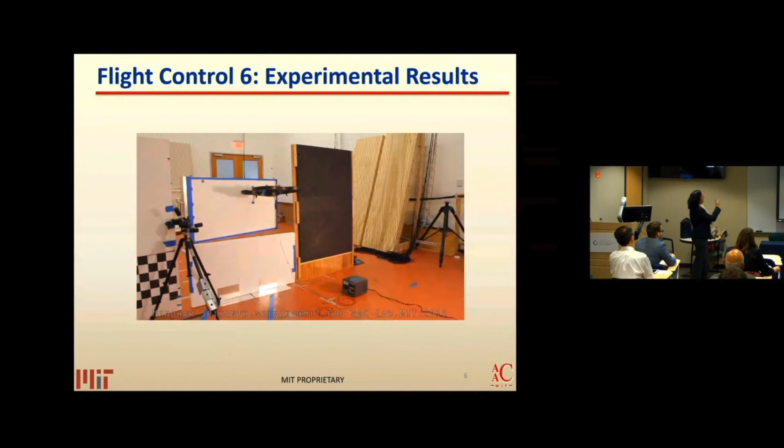So here's another one. Again, this too, we wanted to make it adaptive. The idea is that you don't know where the hinge is, so it uses the real-time information in order to figure out the direction of motion. Then it figures out, through small changes in force and position relationship, and opens the door and walks out. So those are all the different things that we've been doing.

We're now looking at cyber-physical security. So not only do you have these kinds of disturbances and uncertainties, but deliberate attacks. Are there ways in which we can design adaptive controllers that stay a step ahead of the attacker and figure out the intentions and all of the different disclosure, detection, and disruption attacks? And how do you determine what the online metrics are that one needs to monitor?

And we are trying to come up with ways in which we can introduce uncertainties deliberately into the software model, which is probably what the attacker is using, whereas we are able to adapt to it and make the estimation error small, and see how we can continue to change the level of detection of those stealthy metrics and stay one step ahead of the attacker. So that's what we're looking at right now.

What if they get into a reference model? Well, yeah, okay. Then you need to have a reference model for the reference model and figure out how you can keep ahead of it. It's all, you just need to stay one step ahead. That's it. So that's what we're trying to figure out. It's a never-ending process. Thank you. Okay, thank you.

Questions? I had a question, curiosity. The way you modify with the loop the reference model to make it somewhat smoother or more reachable in a way, isn't it just a way of imposing constraints on the output of the model that you're trying to learn? I mean, that's probably an easier way of doing it this way, or yes and no.

So it's a very interesting thing that we're doing with a closed-loop reference model. So the feedback is coming from the error, E. That's my tracking error. And that tracking error goes to 0. It is guaranteed, independent of the value of L that I choose, right? Therefore, asymptotically, my closed-loop reference model does become the model that I want to track. Because of that, I'm not trying to really change the output throughout the whole time. So this is why I like my analogy of the parent and the child. Eventually, the parent does let go of the hand, but not while it's adapting, not while it's learning. So that's what's nice about it. So that's what this says in here.

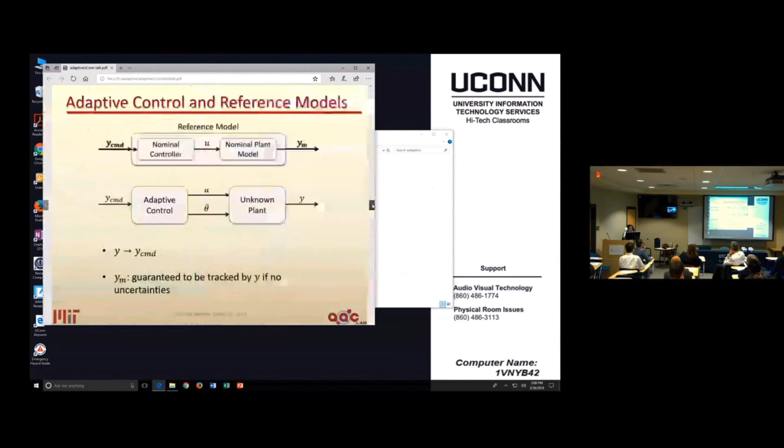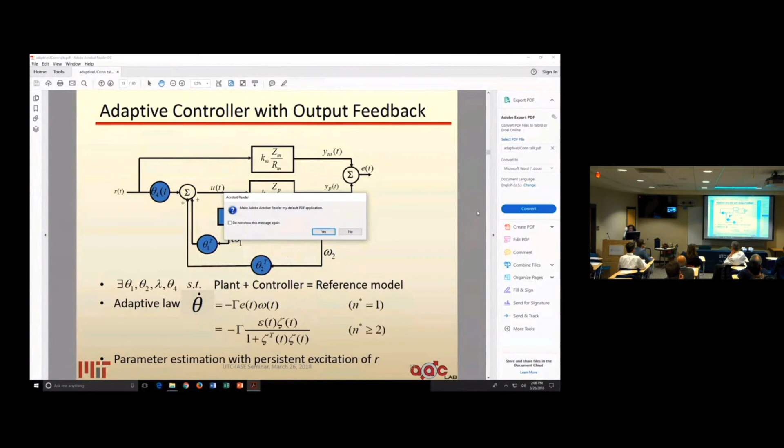Okay, this is a different PDF thing, huh? Yeah, it seemed to open in the browser. Yeah, okay, let me open it in a different way. Yeah, okay, open with, right? The first. There we go. Okay. Just click no.

So, okay, this L is coming from the error E. So eventually E goes to 0, in which case this red line disappears. So it completely is in sync with the spirit of adaptation. Otherwise you would have to adapt the theta dot, which is the way you adapt the parameters, but then you don't know how much they reflect on the output. Therefore, this is an easier way of achieving it.

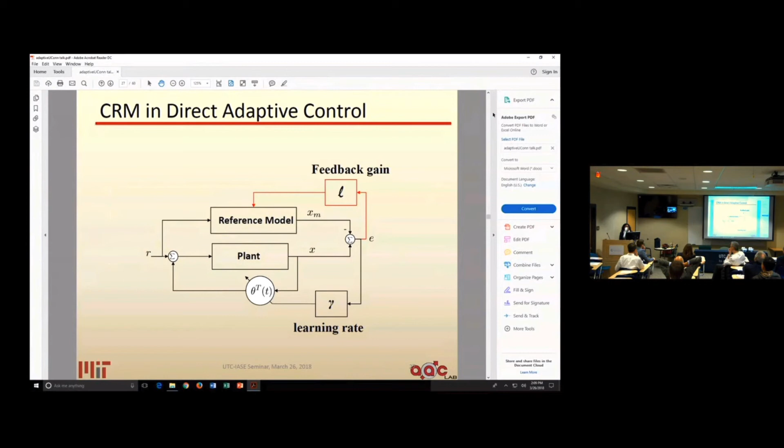Right, exactly. And what it is basically is some amount of correction to what you're learning during learning. Exactly. So that's why it really comes in. It's not just introducing a filter. So you go back to your first order system. I just want to get intuition for what it is doing. Your minus integral of XP times e, right? Yes. Absolutely. This one. So what exactly is it doing? What it's doing is that, look at what this is, right?

So this is basically an integral controller. Right. So your XP, in the simplest case, when there is no reference model, let's say I'm just doing regulation around 0. So XP is just E. Your gain is then just integral E squared. Okay? And that is the gain. And I'm multiplying integral E squared with E, because XP and E are the same. Right. So it's just a nonlinear integral controller. That's what the adaptation is.

Which is why it's good, and the bad comes because it's an integral controller. They can have wind up. Right. Which is why you have the oscillations. And which is why you need to worry about robustness, because integral controllers can have parameter drift. So, one way we do anti-wind up is turn off the integral control. There are things called dead zone modification that we've introduced over the years. Parameter projection does the same thing. It just basically puts a bound on it.

And it turns out that that's a very good fix, because while you do have the bounds, that just gives you safety that things don't run away, but inside you're adapting. So you are trying to customize. Another way to think about it is that for every uncertainty, I'm providing you with a customized linear design, because I don't know a priori how much gain I should have. We have actually implemented them in a precision machine system. It works very well in adaptive PID. It's really like an alternative to Ziegler-Nichols, which basically self-tunes its gain. Over the years, Karl Åström and a number of us have worked on it, that automatically self-tunes its values for the specific uncertainty that you might have in that particular problem.

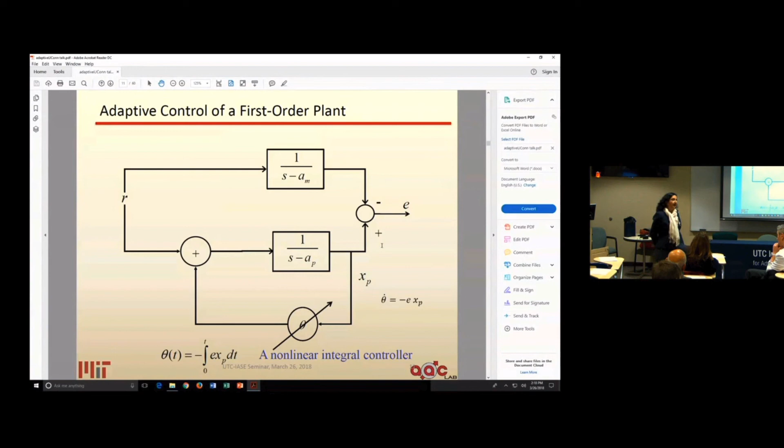I know that people talk about unsupervised learning, but those again are, I think, usually supervised. Yes, but you still could have some kind of uncertainties and build the distribution when you're not sure about the rest. That's a gut reaction. My contention is that somewhere implicitly there is a reference model notion when you have supervised learning. So this is basically your reference model, like the IMC type of thing, right? Adaptive IMC is what you're saying. Yes, it is similar to that. Correct.